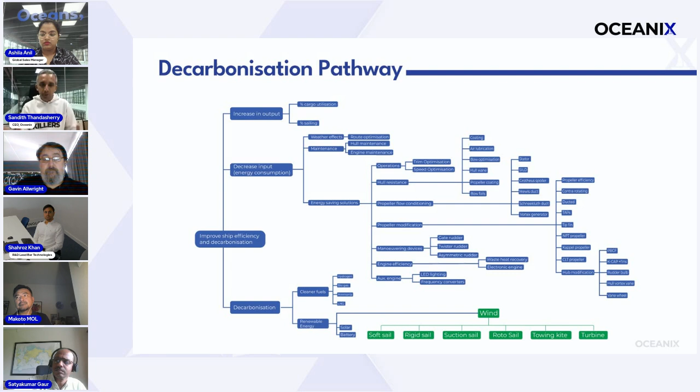So in this, we will focus on propulsion as the prime driver need, because wind can also drive energy to the auxiliary side by generating electricity, like vertical turbines, etc. But the focus today is propulsion. And if you look at it that way, there are four major technologies, and again a few more. The four major technologies we want to discuss today are the Flettner rotor, the suction wing, the rigid sail, and the kite.

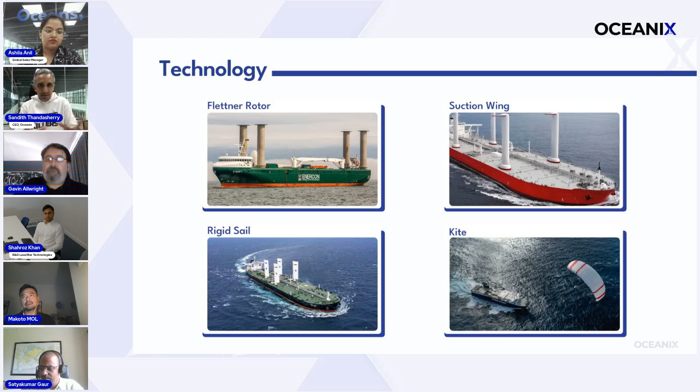These have dominated the installations in the past few years, and from recent orders, these also seem to be the dominant four. Of course, there are soft sails and a few hybrid ones in addition. This list is from Clarksons, and it shows different kinds of ships and the technologies adopted. This includes both what has already been installed and what we define as the order book, which is going to be installed in the next couple of years.

So a few things you can see: historically Flettner rotors have been the dominant one, but based on the new orders, it is now the suction wing that is becoming dominant. And mostly it is bulk carriers and general cargo vessels which are the really dominant vessel types. So this is just the context side.

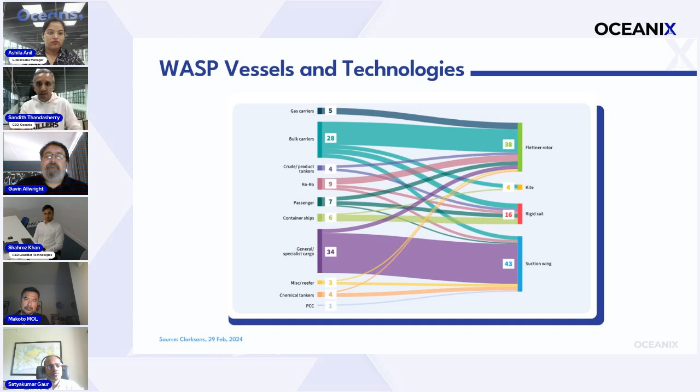Now, when we talk of propulsion, when we try to understand the use or reduction of propulsion energy in any analysis, we try to separate out the engine output, which is the shaft power, and the speed achieved. The reason we do that is to separate the engine performance from the hull performance. So this is the first analysis we do. And any energy saving device which is trying to reduce the propulsion energy requirement is analyzed in a particular way.

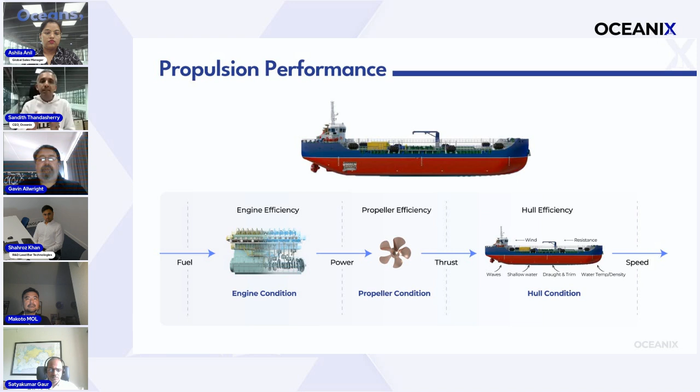There is ISO 19030 for analyzing any energy saving device, which we usually do as a pre-post analysis. We do a speed loss analysis. We try to understand the change in speed loss, hence the fuel saving, then convert that percentage into fuel quantity, and then using the fuel price into the amount saved per year, to finally understand the capex and the ROI. This is normally what we do for energy saving devices.

But when we do it for wind, the analysis is slightly more complex, which is one of the interesting things that I hope will come out of this webinar. Now, typically for an energy saving device analysis, we try to avoid rough weather conditions, what we say is more than sea state 4, and do this pre-post analysis.

Whereas when we have an energy saving device like wind installed, wind works best when the wind itself is high, which is not necessarily sea state 4. So the optimum case where you might choose to go with an energy saving device like wind is different from a typical energy saving device. And the ROI computation also is different because you don't want to eliminate the high sea state, or thereby the high wind condition, when we do this analysis. So thereby the analysis is different.

Now, when we do the analysis, another key point is when we do a cost of energy in a ship. In a ship, you can say the energy comes from 5 sources. Of course, the main one is the engine and some kind of fossil fuel, which can contribute to main propulsion or to the auxiliary. There are other sources, which could be some battery tech, which is energy from the grid, or some fuel cell and some clean fuel, or it could be solar or wind. So these are practically the 5 types of energy.

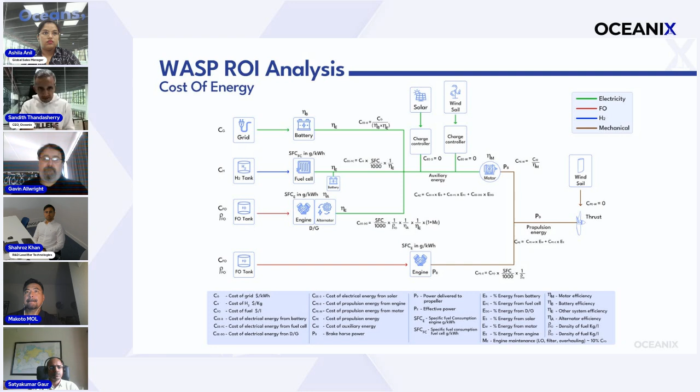So when we do this analysis, the important point to remember is that wind solutions, or at least most of them, need some energy input, which could be an electrical energy input. So there is a slight auxiliary power increase and there is a propulsion saving. The cost of energy of both is not the same. For example, the cost of auxiliary energy in terms of kilowatt hour is at least 15 to 20% more than the same energy from a diesel engine when used for propulsion. So this is a crucial element when we do this ROI and this break-even, and this is something which we want to understand from the experts here.

The second point to understand when we do analysis is that most vessels may start with no route optimization and no wind solution, which means you may go the shortest route from A to B, which is route 1. When we have route optimization installed and there is no WASP or wind technology, you may follow route 2, which tries to identify favorable weather, avoiding the rough sea and reaching at the same time

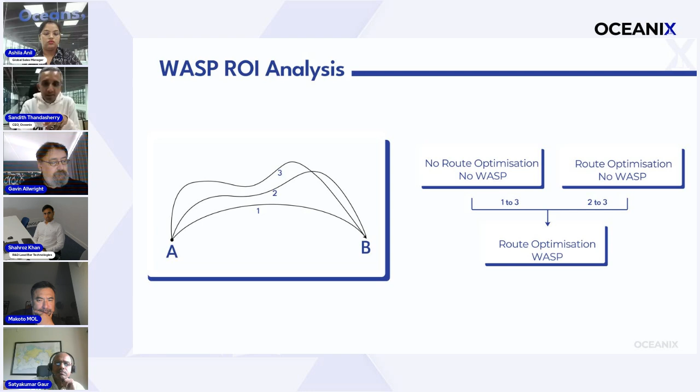with a lower fuel consumption. Whereas in a scenario with wind solution and route optimization, you may have a different route 3, which tries to get the benefit of favorable winds, a different route, and still a lower fuel consumption. Keeping in mind that the energy input for running the wind propulsion is also more expensive than the propulsion gain. So this is something we must do when trying to do an ROI. This is what I just want to set the stage from an analysis perspective, and I'm eager to listen to the experts about all these wind propulsion technologies. Thank you.

Thank you, Sandith sir. Thank you so much for laying this stage. It was wonderful to hear from you. So next we have Mr. Gavin, who will give you an update on the current adoption and the planned projects and discuss the regulatory updates and more. So over to you, Gavin.

Gavin, we're not able to hear you. Gavin, you're on mute. Okay. Am I okay now? Yeah, you are. Okay, and you can see my slides? Yeah, we're good. Okay, lovely. So yeah, thank you, Sandith.

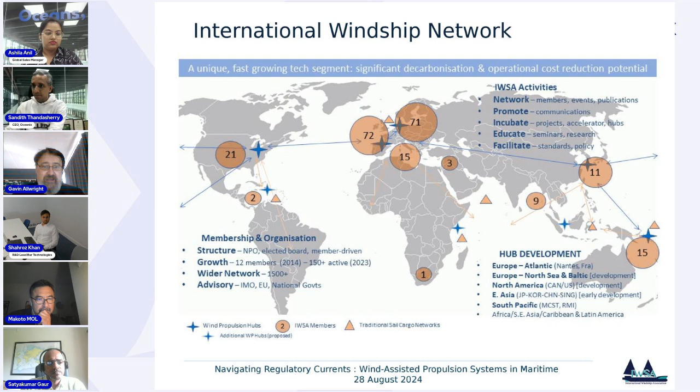That was a very comprehensive run through of the general aspects there. So just very quickly, I'm the Secretary General of the International Windship Association, and we're a network of now around 200 companies, academics, experts, etc., trying to facilitate the uptake of wind propulsion worldwide. We actually take an energy perspective, and I'm going to try and give you the overview of where we are and the push when we talk about regulation and the situation with the IMO, EU aspects, etc.

So we take very much an energy application rather than a fuel application. Wind energy itself is across the board zero rated for emissions. Obviously, it's zero rated for cost as well. We don't require the infrastructure. It's basically an energy source that's delivered to the point of use without any mining, refining, transport, bunkering, or storage costs involved. Of course, the wind propulsion technology is a different matter. There's obviously going to be investment cost involved there.

But actually, we could also be looking at a leasing approach or a pay-as-you-save approach to adopting these, which would move a lot of the heavy CapEx over to an OpEx aspect. So that takes some financial work.

But with the adoption of a free energy source and retrofits, around 5 to 20% of the propulsive energy being delivered, potentially optimized up to 30%, as Sandith mentioned, around weather routing as well, around the improvement or increase in size of the systems. And then we also have optimized new builds coming into the mix as well.

Now, I'll just talk generally about ROIs, because there are a number of key considerations around the ROI from the cost side, but I'll talk about that in a moment. But we're also talking about 2 different aspects. We've got the wind assist, which is a retrofit, putting a system onto a ship that's not designed to take that system. So it's a ship designed as a motor vessel, and then you're putting wind on top.

So you've got issues, for example, the amount of freeboard and the turbulence that creates around the wind, the siting of the systems, the size that the system can be adopted. Does it need to be a retractable system? Can it be a full rigid system? Many, many considerations. So to create a general ROI for each technology and each ship is actually quite challenging.

There are comparative attempts to do this, but they're always delivered with a large question mark over whether these are accurate or not. And really, the proof of the pudding is in the eating, is getting the systems on, simulating the systems.

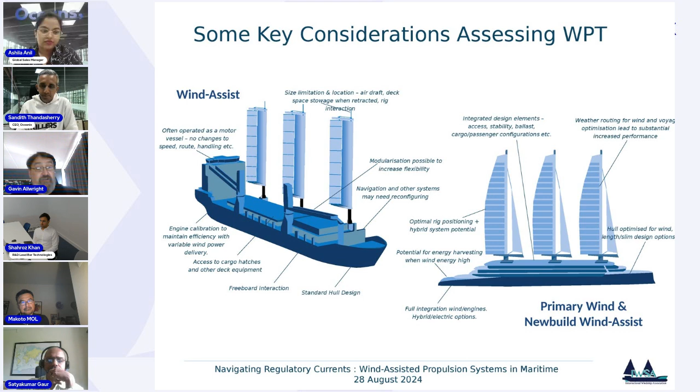And then if we look at the primary wind situation, then we've got a lot of ability to really site the systems properly, have the largest systems with the best counterbalance measures on those. And we even move into the area of energy harvesting, where we're generating too much wind, so we can regenerate or capture some of that wind in other ways.

I'll give you just a very quick overview of the market. Sandith's already shown some of the Clarkson aspects. One of the key problems, if you like, around innovation is we will see spurts of activity for each of the technologies, depending on the date they started, depending on a large order coming in, and then maybe a quiet period. But each of these technologies is basically competing. These figures here are from Q1 2024.

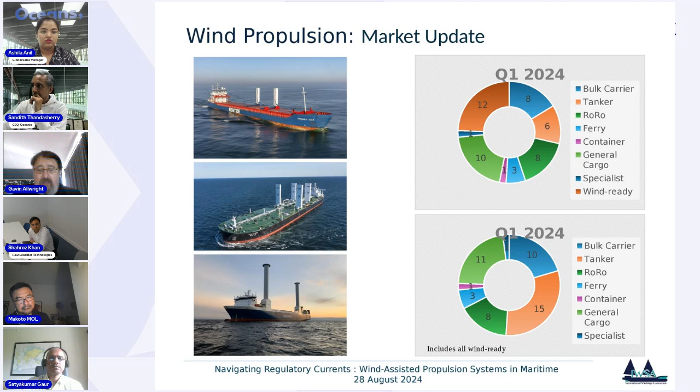Today, there are 37 ships installed with another 12 wind ready, meaning all of the work has been done on those ships. And we're looking at a pipeline around about this time next year of between 80 to 90 vessels installed. And that will be important when I talk about the next issue.

Here are a few pieces of news that have been released. I won't go through them in detail, but we're starting to see small or medium-sized fleet orders. And rather than the one or two ships, this is starting to indicate that we're approaching a tipping point. We're approaching a point of inflection in the S-curve. So we have an S-curve in development, and I'll talk about that in a moment with policy as well.

That market potential, we're looking at, as I mentioned, 87 installations, wind ready, at the end of Q1 2025, maybe a little bit later, we're not sure. It's very difficult to tell with yard capacity, with the delivery of each vessel, but this is approximately where we are. So pretty much doubling every 12 months.

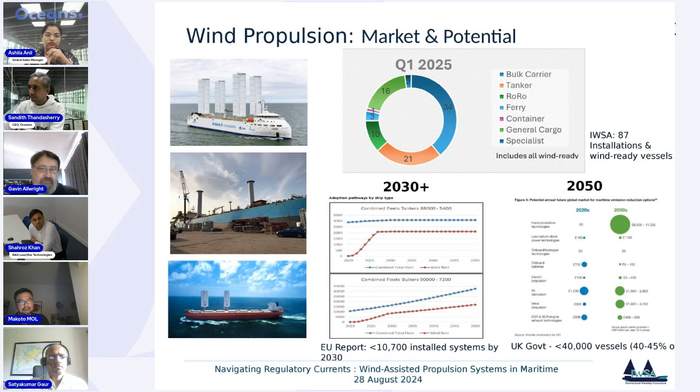That would lead, if we continue to do that, at 2030, to around about up to 10,000 installations, especially in the bulker and tanker sector, although we have the Ro-Ro, general cargo, etc. And then by 2050, the UK government has estimated that between 40 to 45% of the world fleet would be installed with some form of wind propulsion device. We think that is conservative.

And indeed, we did an energy mix survey among ship owners, general maritime stakeholders, and policymakers. I think it was 87 respondents. This one's showing just the stakeholders from the maritime sector and 19 of the ship owners. What we did, though, which was different, we gave everybody 5 options they could choose for an energy source for 2030, and another 5 options for an energy source for 2050. But we included wind assist and primary wind into that mix. And this, as far as we know, has never really been done.

And interestingly, the top 7 or 8 systems are always put in because they're seen as fuel or commoditized fuel sources. Whereas wind is often seen as an energy efficiency measure, which of course it isn't. It's a propulsion or a propulsive energy force. And the first 8 or 9 options actually match very, very closely to the responses that we've seen in many, many other surveys amongst the industry.

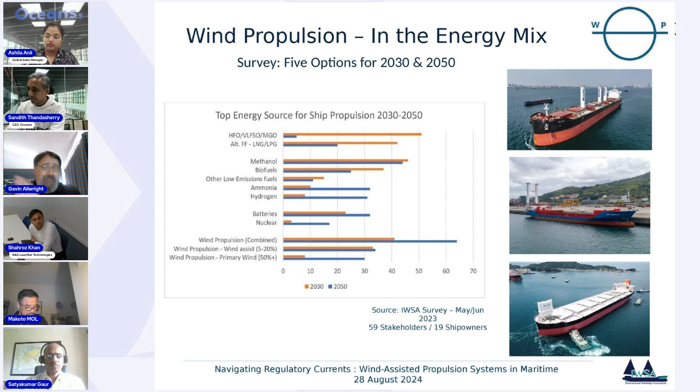But when wind was added, that didn't change, but wind came very strongly into the mix too. So, of course, retrofit and wind assist was seen as a strong option for 2030, but then primary wind was seen as a strong option for 2050 especially. And if we put them both together, it became, by 2050, actually, if you like, the energy of choice, or it would certainly be the energy used in association with others.

Now, this slide just shows very quickly the policy framework. So we've got a large number of policies coming through from IMO, which are all in the blue. We also have the EU policies coming through, which are in the green, and we have industry aspects as well coming through in the pink. Now, the issue here is none of these singularly do the job. Not one of these levers will actually push wind propulsion to being a serious contender.

However, collectively, the pressure being exerted on the industry is going to be almost irresistible to adopt a solution that is globally available today. It's very low cost. It's zero cost as an energy source. But of course, the issue will be around how much does that cost to get it onto your ship. And I'm going to focus just on Fuel EU Maritime in a moment, because that's the one that's pending, and actually quite an important one.

But the dashed pink line that goes through the middle is the estimates that I showed you in the previous slide from the EU and from the UK government. And you can see the inflection point, that steep upward slide around about the end of 2025, 2026. This is when most of the policies are in place, so the Fuel EU Maritime, EU ETS, EEDI, CII, etc., but also other IMO GHG reduction measures, for example, a GFI or a GFS, and the carbon pricing won't be in place, but it will be decided and indicated for implementation in 2027. So at that point, we should know exactly what we're facing in the pipeline. Plus CII will be under review at that point as well.

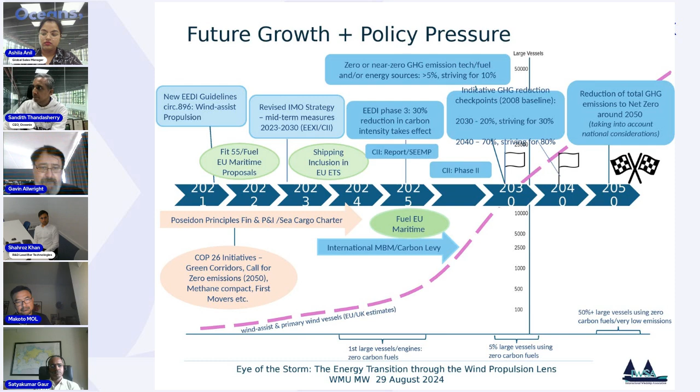So just very quickly on Fuel EU Maritime, many of you will already know this, but some of you maybe don't, that there is a wind reward factor within the Fuel EU Maritime regulation. Now, what this does is you have the standard formula to calculate the carbon intensity of the vessel and the fuel, or the energy, that is being used. Now, wind couldn't be included in that formula this time because we didn't have a standardized approach for calculating it. We had lots of different approaches, but there wasn't a standardized one. And we've been working on that.

And actually, I'll show you that we have a submission that's going into IMO just at the moment. But what this does, it recognizes that wind is a very special energy source, that it's actually zero emissions across the board, not just in GHG. And you're given a reward factor of between 1% and 5%. So this can actually make you compliant through the 2025-2030 period, and actually substantially contribute, especially if you've got the 5%, to the 14% that's required for 2035.

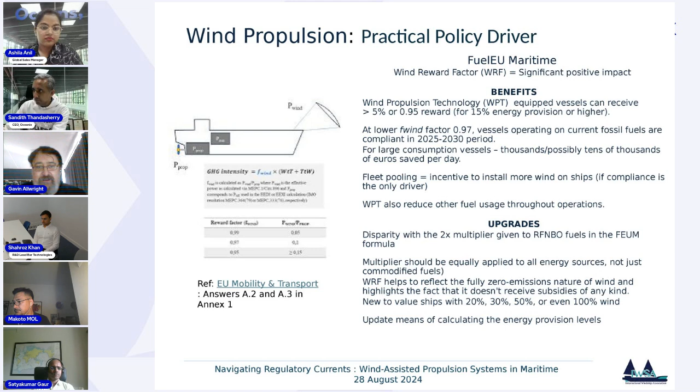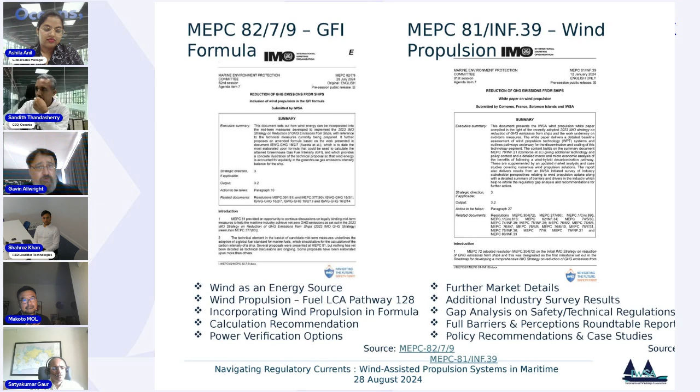I notice I've only got a couple of minutes, so I'm going to move through very quickly on the last ones. We have the GFI submission into IMO just at present for MEPC 82. And at MEPC 81, we had our wind propulsion white paper submitted. So if you're interested in a lot of the safety or technical issues, a lot of that is covered within that white paper as well. And there are links to the EMSA report on technical issues as well. But pretty much those issues are not huge issues now. It's much more about the facilitation.

I'm going to skip this one because it's a bit of a general one. This will be my last slide. So what other aspects can we actually look at here? Well, we could be offering tax credits for wind propulsion. The wind routing and wind corridors, incorporating wind into green corridors. We've always had wind corridors. They're called the trade winds. They're called the monsoon winds. But we don't use them anymore. We actually see them as a problem rather than a solution for fuel-powered vessels. When we incorporate wind, we actually have conveyor belts of energy that we need to be focusing on.

An equitable transition. This is really important, that we really need to be promoting low-cost energy sources and financing those for least developed countries and small island developing states. I've already mentioned leasing. Wind ready: actually having a standard where every vessel that goes into a shipyard for its dry dock, or new vessels that are being built, we could actually make them all at a reasonably low level wind ready. So strengthening the hull areas where wind propulsion would be taken on board, or in the designs, looking at radar blanks, navigation issues, and at a very, very low cost at that time. Doing it later is a higher cost.

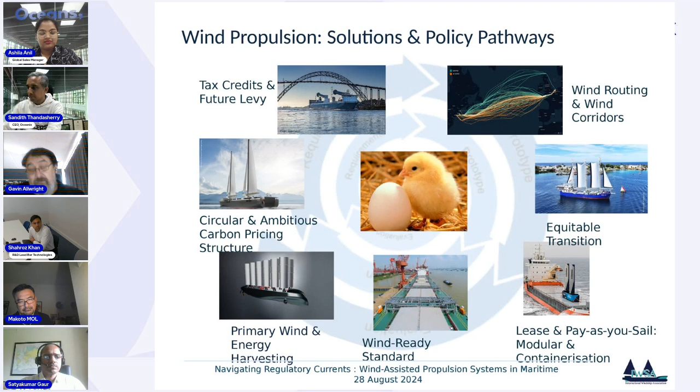And just one last one I'll mention is, we're talking about carbon pricing, having an ambitious carbon pricing structure, but making sure that finance comes back into the industry to actually fund the systems that are being developed. This will turbocharge the entire decarbonization of shipping, and we really need to be mindful that this should be the way to go. And I'd just like to say thank you very much. As we like to call this, it is a win-win-win situation, but we're looking to rewind, not rewind to the past. So if nothing else you take from my presentation, please remember those two expressions.

And I'm really looking forward to the rest of the presentations. Thank you. Thank you so much. I think while we were talking with Gavin at the initial stage, he mentioned that he could go for days talking on the same topic. My apologies. And no, it's okay. We love hearing you. So thank you for your valuable insights.

It was great. And next we have Mr. Shahroz to talk about his perspectives on BAR Technologies as a technology provider, and he will be discussing the challenges and opportunities they face. Over to you.

Let me start sharing. First of all, can you see my screen and can you hear me loud and clear? Yes. Okay, thank you very much, Ashila, and thank you very much, Sandith. I fully agree with you that there are certain aspects, especially from a route optimization point of view, if you want some great ROI. And thank you very much, Gavin. It's always nice hearing you, and it was a very nice holistic view on wind-assisted propulsion systems.

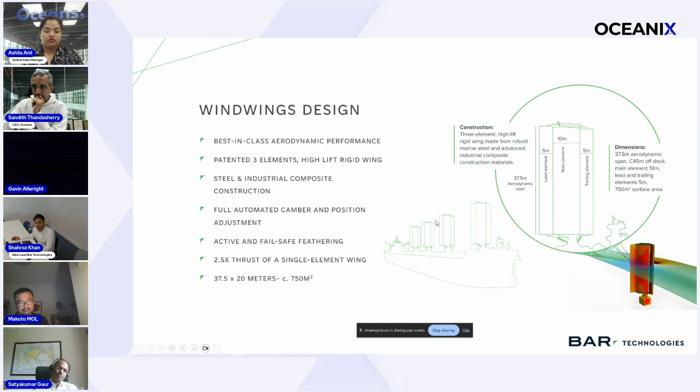And the entire structure is made of steel and industrial composite material. It is fully autonomous. It can adjust itself to obtain maximum savings in various wind conditions. Talking a bit about savings, our simulations have shown us, as I said, on average on global routes, we can achieve 1.6 tons of fuel savings, which equates to 5.12 tons of CO2 emissions.

And if we have good conditions, like if the wind is around 20 knots and the true wind angle is around 100 to 130, we can even achieve a staggering 6 tons of fuel saving per wing per day, and that can equate to 19.2 tons of CO2 reduction. These huge numbers are only possible through the unique design and the unique system that helps to propel this

structure. And our simulations have also shown us, for example, for a cargo vessel or a bulk carrier going from Brazil to China, a full load condition can give you a saving of 1.7, and the ballast condition can give you 1.3 tons of fuel savings per wing per day. And if the vessel is going from Japan to Canada, it can go towards 2.6 tons of fuel saving, and on its way back in the ballast condition it can give you around 2 tons of savings.

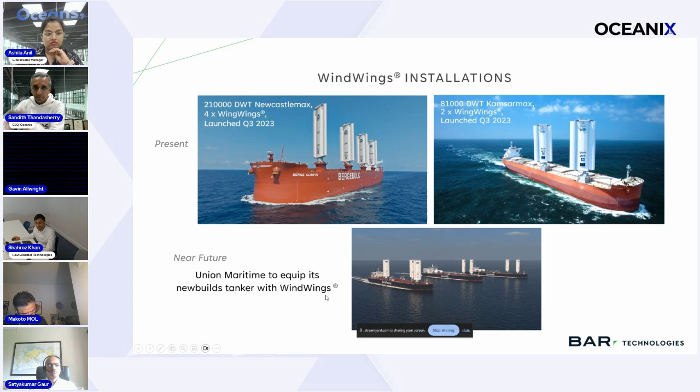So far, BAR Technologies has fitted 6 wings on 2 different vessels in the third quarter of 2023. The first one is Pyxis Ocean, and the second one is the Berge Olympus from Bergebulk. And now we are in a very interesting time, as recently BAR got a contract from Union Maritime to fit our wind wings technology on their 34 new build vessels, as Gavin mentioned in his presentation.

Regarding the operational mode, the wind wing system has various operation modes to achieve maximum efficiency in various wind conditions, and also to provide safe and ergonomic operations. Among these there are 3 main operation modes. One is the active mode, when the wind is providing you maximum fuel savings and maximum CO2 reductions. And the other 2 are active and passive feathered.

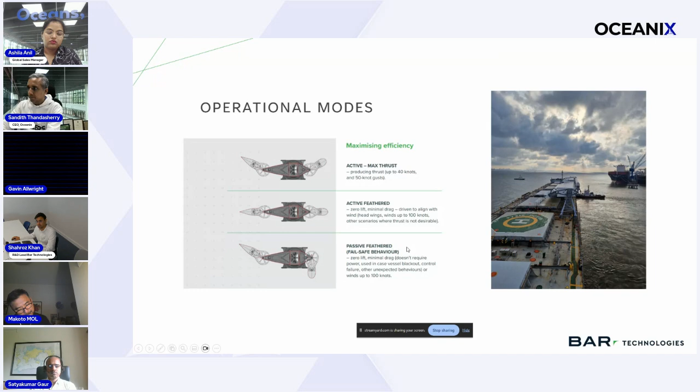These 2 operations are mostly when we don't need the lift, when the wind is above the operational limit, or if there are any failure scenarios or vessel blackout scenarios. The entire system is automated, it identifies itself, it operates itself, with very little input from the human. So these are some operation modes in action. Here you can see the port operation mode, folded at sea, and the active feathered mode.

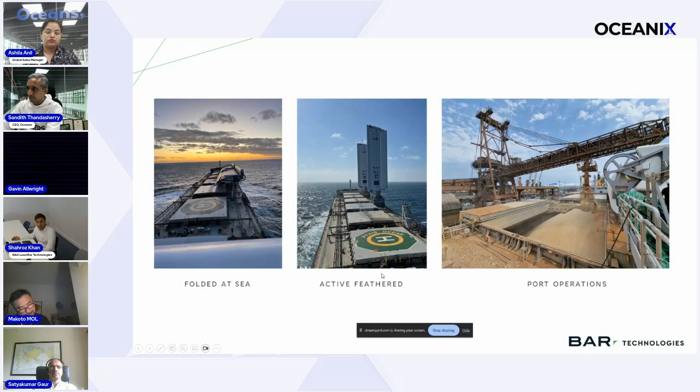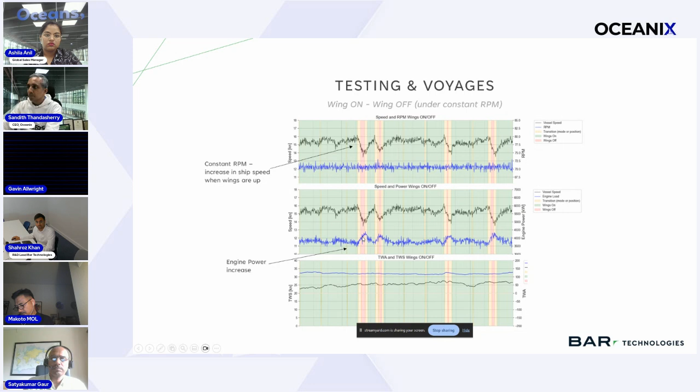So here you can clearly see that when the vessel is at constant RPM, as we have put the wind wing off, you can see the reduction in the speed, and the speed is higher compared to when the wing is off. And similarly, you can see the increase in the engine power, how the engine power has increased when the wings were off. So that definitely shows some promising results.

And all these results were further validated over the 6-month voyage of this Pyxis Ocean vessel. We validated that this vessel over 6 months in favorable conditions achieved 32% of fuel savings. And that was definitely great for us. And that definitely equates to what we proposed, what our simulation showed, that our technology could provide 1.5 tons of fuel saving, or approximately 5 tons of CO2 emissions reduction per wing per day.

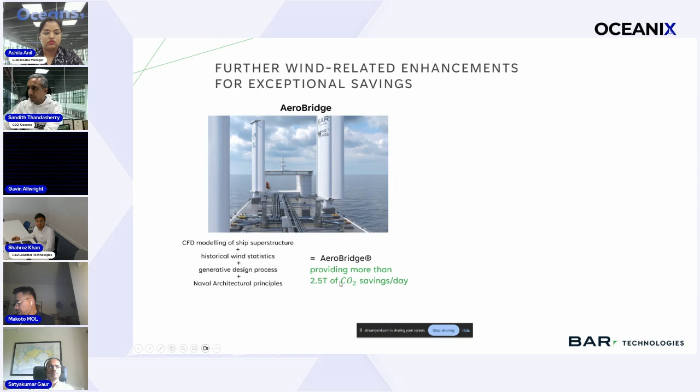Along with wind wings, that's not the only technology BAR has that extracts the power of the wind. We recently developed a new type of superstructure, which has wind in its intrinsic nature and can provide more than a further 2.5 tons of CO2 savings per wing per day.

And secondly, BAR has also been advocating that although these wind-assisted propulsion systems are great for retrofitting and can provide great fuel savings and emission reductions, if we redesign vessels around these technologies, you can further enhance these savings. And this is one example of one study that BAR did. So for example, this is a tanker. When we fit the 4 wind wings on the baseline design, we could achieve 15.9% savings in terms of cost per cargo mile.

And when we combined both wind wings and the aero bridge and optimized the shape of the vessel by keeping these wings at the center of the design, we could approximately double the savings. That shows that in the future we should start redesigning these vessels. So with this, I would like to conclude that it's definitely an exciting technology. A lot has to be developed, and I think it's just the beginning of this exciting adventure.

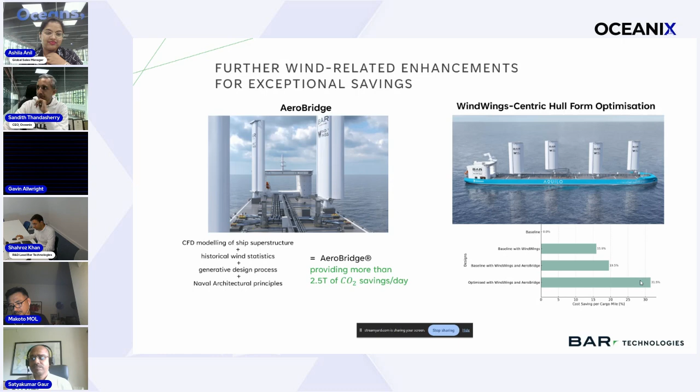Thank you, Mr. Shahroz. We are also excited to know about it, and thanks for revealing it over here. So next, we have Mr. Makoto. He will be elaborating on the role of wind propulsion in the Blue Sail project at MOL, and also the impact it has on the shipping industry. I think MOL is one of the pioneers in wind-assisted propulsion system installations. Over to you.

Hello? Yeah, we can hear you now. Okay, you can see the slide? Yeah, we could, thank you.

My name is Makoto Yamaguchi. I have worked at MOL since 1991, always working on technology improvement for shipbuilding and shipping projects. Today, I'd like to introduce our energy-saving device under development, Wind Challenger. This is a rigid sail type, the same system as that technology, but it may look different. I'll try to explain both the technical side and the commercial side. Time is short, so I am not sure I can explain enough, but I appreciate your patience in listening to my presentation today.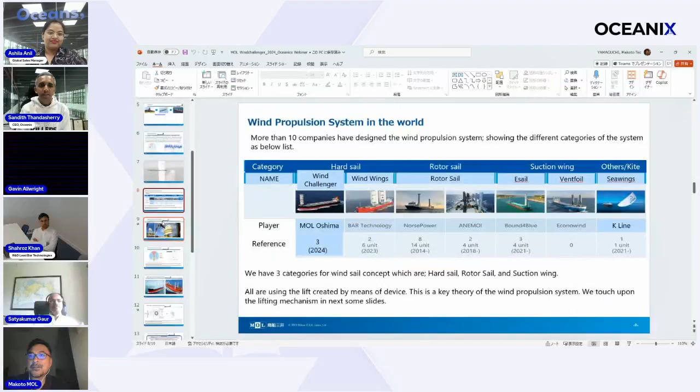Okay, like I explained, I skip this one. And also, maybe you cannot see. Okay, this is our character, a Wind Challenger character. Still, you can see that? Yeah, we can see. We are in slide 9, but not the video.

Facing is necessary, but sometimes there's very strong wind, or you have to go through a very narrow strait. So in that case, you can make this wind minimize the... maximize the thrust power by the wind. So this is the most important function.

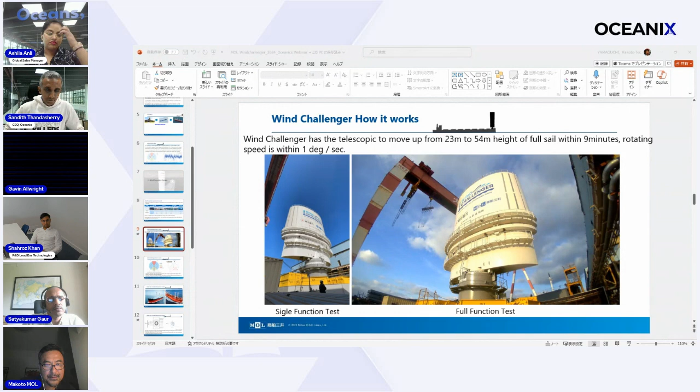Okay, another point is, you can see that in this red color area there is no thrust generation, only 50 degrees of wind from the forward. But in the other area, we can create thrust power from the wind because the Wind Challenger sail is always rotating to face the best direction of the wind.

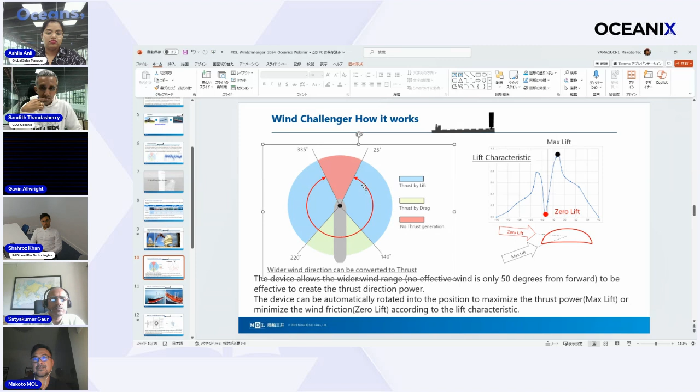So then it may be even smaller or even bigger. So we are always moving to convert the wind power to thrust. So that is another function. So these are the three important characteristics that make the performance of the Wind Challenger. Yep.

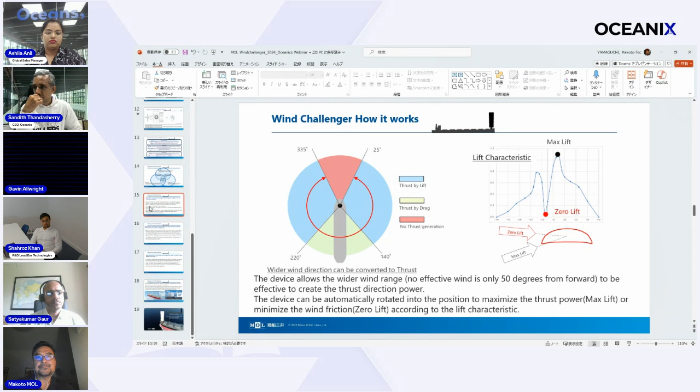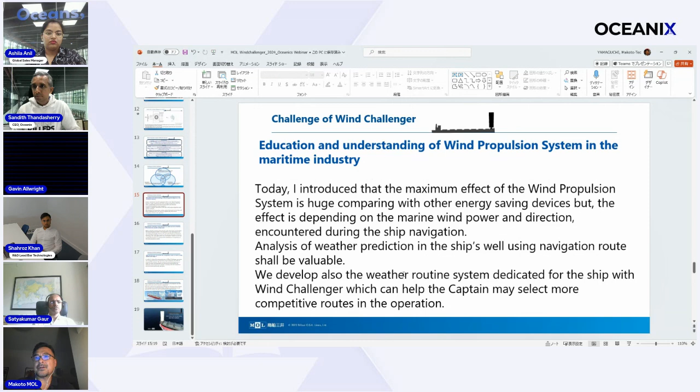But even so, I think we still have to challenge many things. Still, many people don't understand how to operate and what the character of wind assisted devices is. So that is why we started an educational approach on what the wind propulsion system is. We go to the IMO, to exhibitions and other events, and I try to explain what is important. Gavin-san will agree with that.

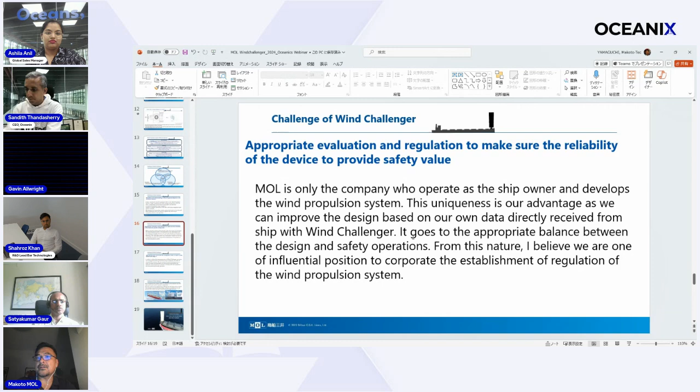Another point is reliability, because these are very new products. It's not only MOL but also many other companies doing this development. But we have to gain reliability fast. It's quite a big system on board. Once trouble happens, everybody loses this reliability. So that is why we carefully design and carefully operate this kind of system. That's what we are doing now.

And the last one is the price. I think currently the cost is very high for the Wind Challenger, and maybe other wind device costs are also very high. But by making many mechanisms to bring the price down, finally the Wind Challenger or other devices can be competitive. Then we can install them on as many vessels as possible. These three points are our challenge now.

Okay, for the Wind Challenger, that's all. Thank you very much for listening to my explanation. Thank you very much.

Thank you so much for your presentation. We did have a lot of glitches here and there. Like you mentioned, it's a little humid back in Japan. Yeah, there was a lot of humidity with your network as well. Thank you, thank you.

But it was great hearing about the installation at MOL. Next, we have Sati sir on stage to present a lot of experience from Great Eastern Shipping, where they reviewed a few of the technology providers. He'll be sharing his case study on that. Over to you, sir. Thanks, Ashila.

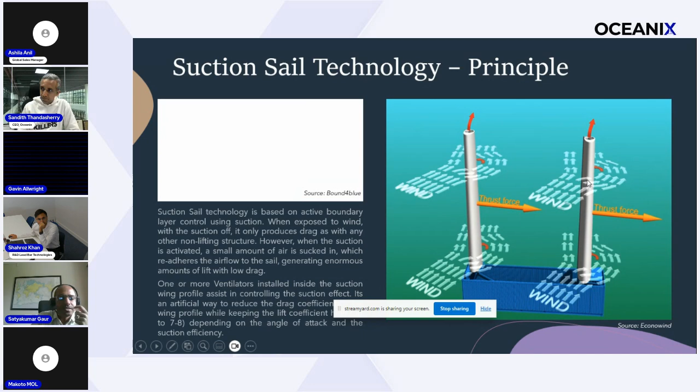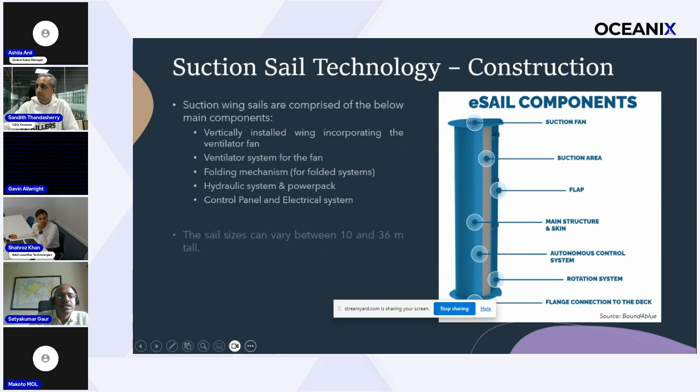So this is their concept. This concept attracted us only because it has comparatively less capex. I'm just trying to show you the components involved in this sail. At the top, as I discussed, there is a suction fan provided. It's a blower which is trying to suck air from the suction area, which is the grayish region in this photo.

So across this grayish area, there are small openings which allow air to move inside, and then through the suction fan, it is being pushed outside. There is a flap provided to control the opening. This is the main structure. They have an autonomous control system inside this sail, and there is a rotation system also inside. There is a flange connection for fitting it to the deck at the bottom.

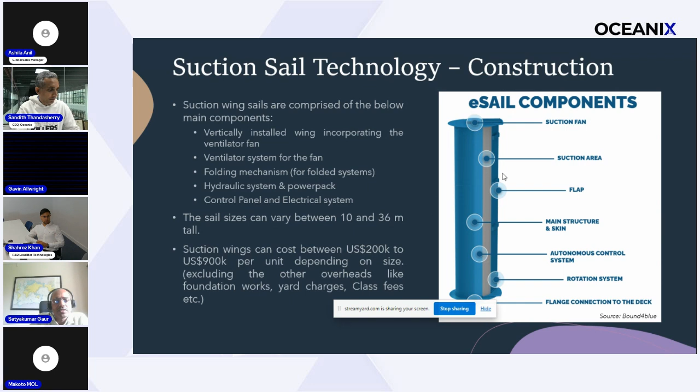They have various sizes of sails from both the manufacturers, from 10-meter to 36-meter tall, costing between 200K to 900K per unit. This will vary. This is just the cost of the sail, but you will have to add the overheads like foundation work, yard charges, class fees. All those need to be taken into consideration.

We had done a preliminary evaluation for a capesize bulk carrier through Bound4blue. We provided them 1 year data of our vessel, and they came back with these results, which considered 10-year wind data and 2 units of 36-meter sail, vessel operating at 13 knots. So if you see, for various routes, they have shown savings. If the vessel is making a cross-Pacific, cross-Atlantic voyage, the savings are much higher.

Like from Norfolk to Algeciras, the savings are close to 4.2 tons. Similarly, from Mexico to Latin America, it is 2.46 tons. But if you have a voyage closer to the equator, the savings reduce because of the wind. There is a thumb rule that as you move away from the equator, you get more and more benefits from wind assist propulsion systems, irrespective of which technology you use. But closer to the equator, the benefits are on a lower side. So this was for bulk carriers.

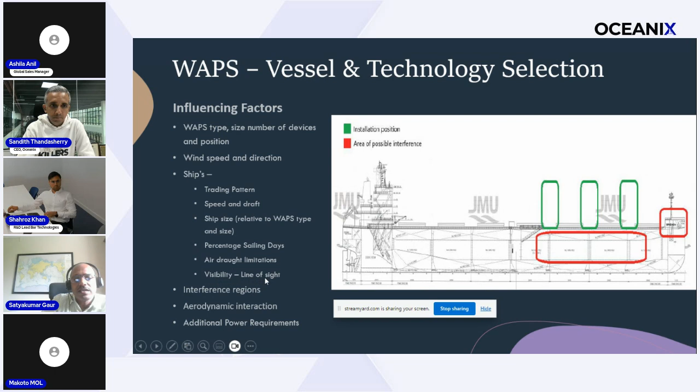One has to consider the air draft restrictions during river passages. So if your vessels are moving into those regions, then better to opt for a tilting type option. Otherwise, it becomes a challenge during those operations for those ports. One has to consider the visibility for navigation, line of sight. This has been taken care of by use of CCTV cameras, but one has to certainly do the proper evaluation during the feasibility study.

Then there are interference regions. So if the vessel has more freeboard, it will create an interference effect, and the lower portion of the sails will not provide you that much benefit. So maybe you can have a pedestal over which you install these sails to maximize the benefits.

Otherwise, you will have areas which will be underperforming from the sails. So these red marked regions were highlighted to us during our study as having interference regions for the vessel which we were evaluating. So every vessel will have different challenges in this regard.

Then there is aerodynamic interaction. So two sails will have their own interaction influence over each other, and the combined savings might be on the lower side. So how to place these sails, how much should be the gap, that needs to be evaluated during a feasibility study. And certainly the additional power requirements.

So every design has got a certain amount of power requirement, whether your existing generator will be sufficient to cope up, or you need to install an additional generator, or opt for a shaft generator installation. That one needs to seriously consider. Otherwise it becomes a maintenance issue for the auxiliary machineries.

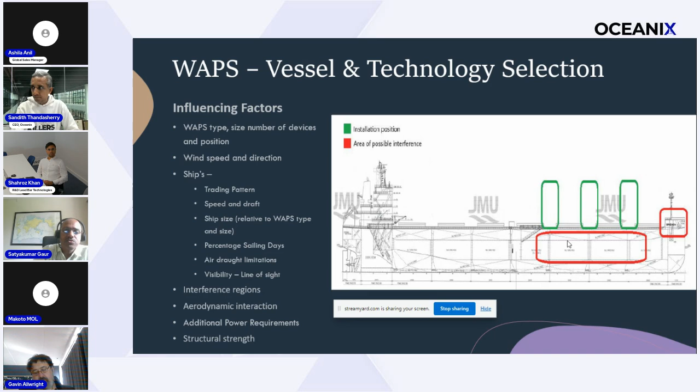The two manufacturers we had contracted, one was Econowind. Econowind has a permanent structure like this, which is a folding type. Another one is a portable one, where they have 10-meter sails in a container, two sails in a container, which they provide on a rental basis. I'm not sure whether they are still doing so, but a couple of years back they had this option: 6 months rental and a 1 year rental.

Another one is Bound4blue, which also has a permanent or tilting type of structure. Both options are available from this manufacturer also. That's it from my side.

Over to you, Ashila. Yeah, thank you so much. That was really good to know about other providers as well. So I think it's about time that we start discussing the questions. We have a few excellent questions on LinkedIn. Sandith, if you could. I can take over here.

So there is a question from Atul Kumar. It's not addressed to anyone, but I think Shahroz is best suited to answer it. So if wind power is being installed on a ship and is generating lift adding to propulsion power, which other aspects like the shape of the bow and other factors that play a part in propulsion would need to be modified? Is there anything that needs to be?